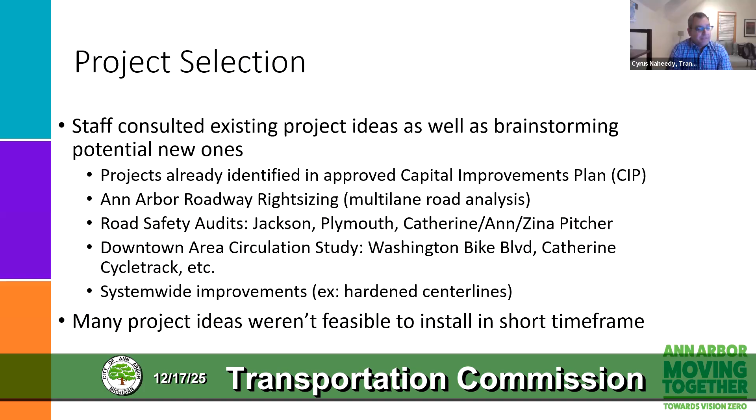That could be a combination of pavement markings or hardened center lines to help with slowing and squaring left turns. And it was quickly apparent to us in our early discussions that many project ideas are just not feasible to install in a short time frame. They involve changing concrete, some level of analysis, some level of coordination. And so going from start to finish in effectively less than a year was kind of a big constraint that we were trying to work through.

And so with that in mind, the CIP, again, a lot of projects identified there are capital projects that involve concrete. The roadway right sizing and road safety audits also are in progress, and we're waiting on that analysis. We didn't feel prepared to be able to build a project based off of an analysis that's not complete. So right off the bat, we ended up striking a few different categories. It became apparent fairly quickly that there was going to be some limitations in how we had to proceed.

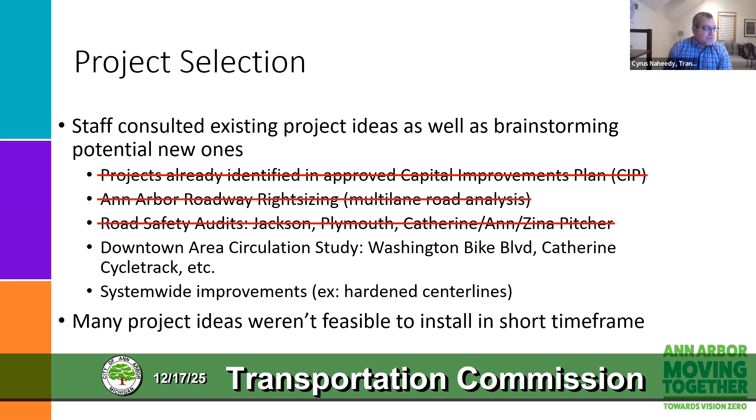So with that in mind, we collectively decided that the Catherine Cycle Track does fit various criteria quite well.

In order to implement the project before June 30, 2026, the existing conceptual plans exist as part of the downtown area circulation study. Public engagement was also completed through that.

There is alignment with Vision Zero goals and identified safety issues. This section of the cycle track is a Tier 2 corridor with crash history, including one A-level pedestrian crash and several less severe pedestrian and bike crashes.

This also builds off of previous work that has occurred here. Two intersections, at Catherine and Ingalls and Catherine and Thayer, have been converted to all-way stops, and we've also installed street lighting to better illuminate those intersections.

But the cycle track would reduce crossing distance and build our multimodal connections a little bit better, integrating into our existing and planned multimodal transportation network.

It builds off of the existing Catherine-Miller cycle track and the recent extension of the Miller cycle track to Maple. There's also integration with the Catherine Glen Zina Pitcher capital project, which we'll touch on briefly in the next presentation.

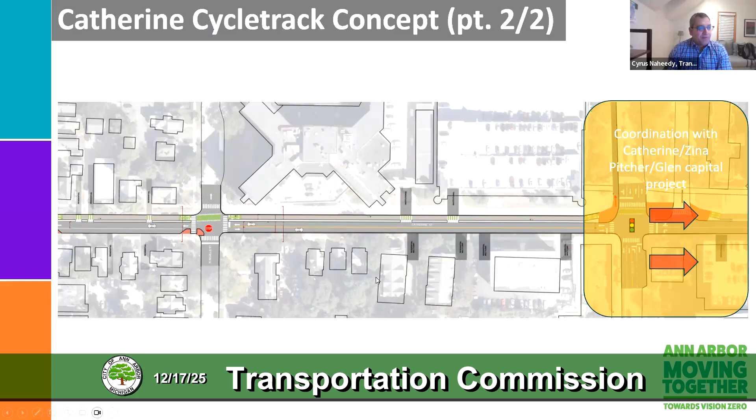So to install the cycle track as conceived and designed, north curbside parking would need to be removed for those three blocks between Division Street and North Ingalls on Catherine.

So the action item before commission would be to recommend or to not recommend approval to City Council of the parking removal resolution. Just wanted to give a brief overview before we move on to either that action item or the next project, but I wanted to get through that as quickly as I could because I wanted to make sure there's time for discussion and questions.

All right, first up, questions, Erica.

Yeah, thanks, and thanks for the presentation. I just wanted to provide a little bit of additional background as well.

So one question I wanted to get answered at the beginning of the conversation, Cyrus, is this a major road? Yes, all of our Tier 1 and Tier 2 roads, as identified in the transportation plan, are major roads.

And so that was one of the questions. I just wanted to make sure the commission all heard that. That was one of the questions I had as well when staff originally sent this presentation, or recommendation, to us earlier in the fall.

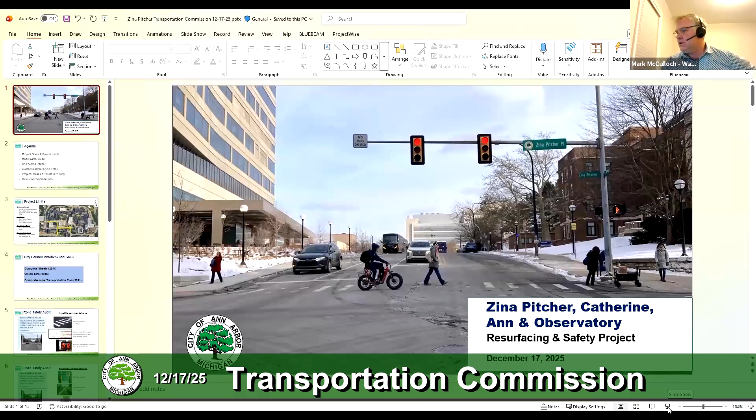Sharing that and going power. Everyone can see my screen? We can, thank you. Okay, so what we're looking at here is the cover slide, a picture of Ann Street looking east from the intersection of Zina Pitcher. It says Zina Pitcher, Catherine, and Observatory Resurfacing and Safety Project, dated December 17th, 2025. This slide is our agenda.

It reads, we're going to talk about project goals and project limits. We'll briefly start with a sneak peek of the road safety audit performed by WSP through a SEMCOG grant. We'll then transition to details of the Ann and Zina Pitcher intersection. We'll briefly talk about a small component discussed previously by Cyrus on the Catherine Street cycle track, go into project phases and tentative timing, which is in flux by the day but we're getting closer to figuring out, and then talk about the detour accommodations.

So slide 3, title reads Project Limits, with a picture of the medical campus of the University of Michigan. There are four streets highlighted in yellow: Catherine Street from Glen to Zina Pitcher, Zina Pitcher from Huron to Catherine, Ann Street from Zina Pitcher to Observatory, and Observatory from the roundabout south to a point just north of East Medical Drive, which is owned and maintained by the University of Michigan.

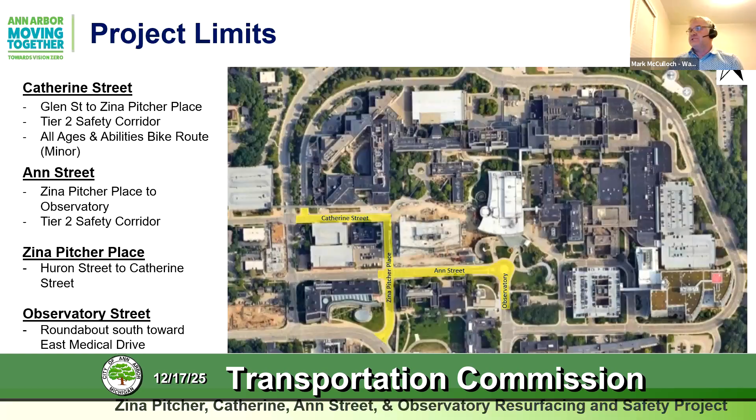Slide 4 talks about city council initiatives and goals. It reads Complete Streets, passed by council in 2011; Vision Zero, passed by council in 2015; and the Comprehensive Transportation Plan, passed by council in 2021. These were the three primary bodies of documents used to figure out scope and what improvements could be incorporated beyond resurfacing the roadway.

Sneak peek of the next slide, slide 5, titled Road Safety Audit Final Recommendations. I was not involved in this study and don't have all the background information. This will be presented, to my understanding, to the Transportation Commission on their agenda in January. However, some of the final recommendations from this study apply to the four corridors listed as part of this project, so that's what I wanted to touch upon.

This slide shows pictures and text of some recommendations from that study. One is a picture of a crosswalk, with a recommendation to provide new pavement markings and freshen them up, which would be automatically included as part of this resurfacing project. Second, there's a phasing diagram tied to updating signal timings, primarily at Glen and Catherine and at Ann and Zina Pitcher, to enhance safety for all intersection users. Third, there's a picture of a countdown pedestrian signal, recommending countdown signals be added at Ann and Zina Pitcher.

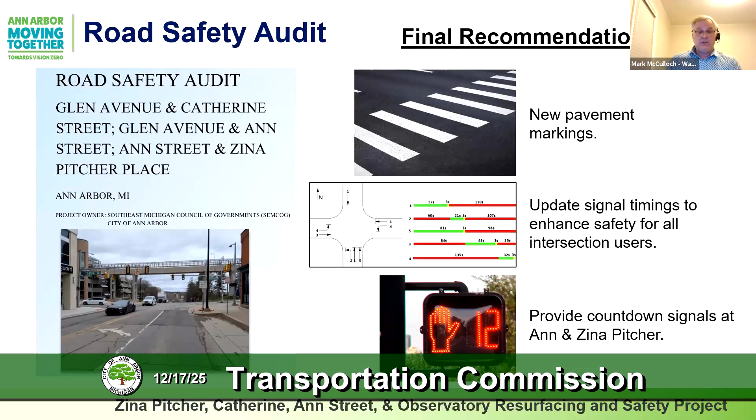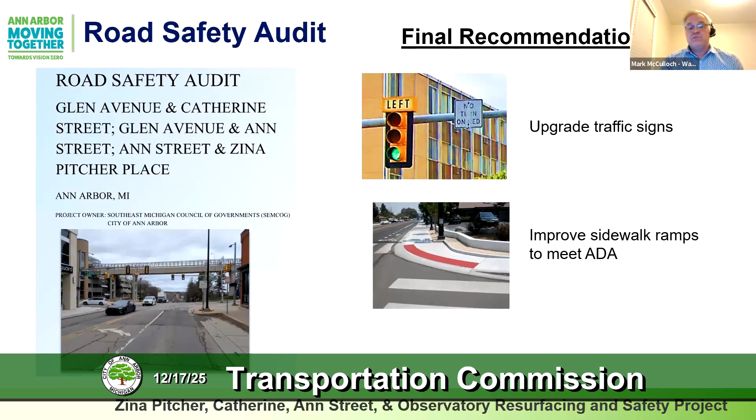Two other recommendations were to upgrade traffic signs, such as a no-turn-on-red sign at the intersection of Glen and Catherine. As part of this project, we would update signs along the corridor so they have good reflectivity, are current with the MUTCD, maintain uniformity, and ensure we have the right signs so we're not overloading messages to roadway users. Finally, there's a picture of an ADA ramp at an intersection, with the recommendation to improve sidewalk ramps to meet the Americans with Disabilities Act.

One thing we plan to do as part of this scope is decrease the radius of the corner but increase the surface area of the sidewalk at the radii, providing bump outs using the space that was there for the right turn lane. This will enhance safety for pedestrians by shortening their exposure time to traffic while crossing from one corner to the other.

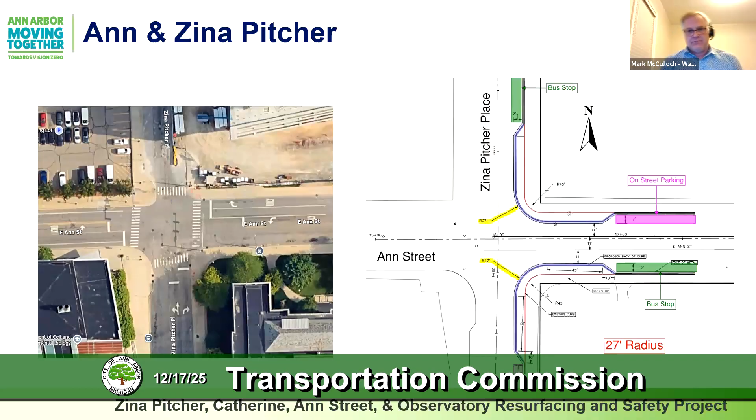Piggybacking off of the next slide, slide 9, titled Catherine Street Cycle Track. There's a diagram here, an illustration obtained from the Ann Arbor DDA circulation report. Cyrus has gone into a lot of detail, so I don't need to get into all the text. The focus of this slide is shown in red.

The dashed blue line is the cycle track in totality from Division to Zina Pitcher. Cyrus's group is focused on Division to Glen, and my team will work with him to finish the cycle track in paint and post from Glen Street to Zina Pitcher. There's no on-street parking affected in this segment, so the resolution just passed is not applicable to this segment of construction.

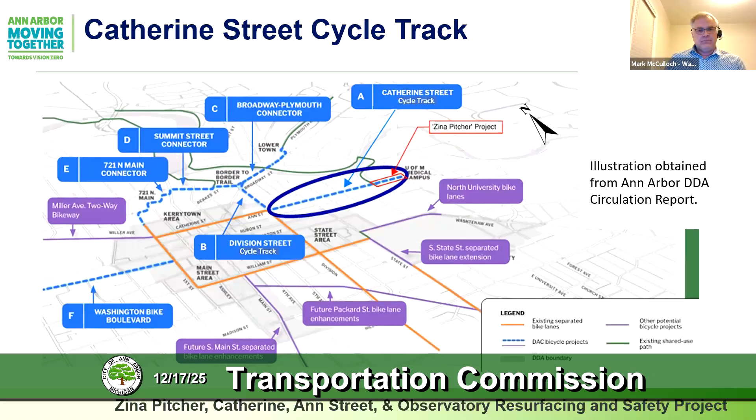Slide 10 is titled Catherine Street Cycle Track, Glen Street to Zina Pitcher. We have an illustration, bird's eye view, and a picture showing what a paint and post cycle track would look like. This isn't Ann Arbor, but it shows a cyclist traveling in a two-way cycle track with a buffer space between the travel lane and the cycle track, using plastic delineation devices to separate cars from cyclists to protect them.

The illustration demonstrates that between Glen and Zina Pitcher there are 3 lanes of traffic, one way traveling from east to west. The idea is to utilize the northmost lane to convert it into a bidirectional cycle track, leaving sufficient space and capacity for motorized vehicles to go westbound on Catherine Street and continue north or south on Glen Street, or continue west on Catherine Street.

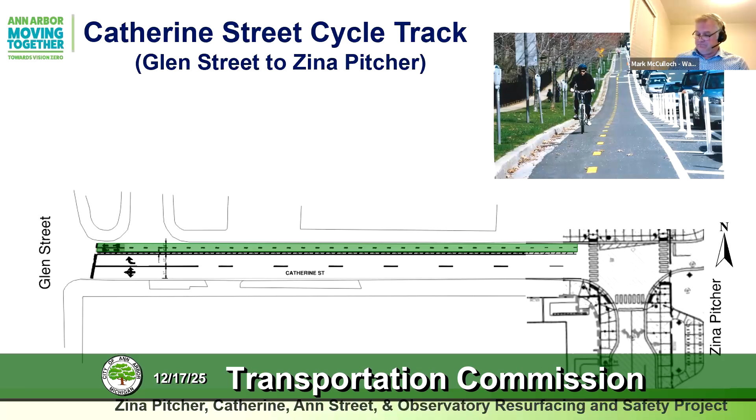Slide 11 reads project scope, with pictures illustrating the main type of work anticipated for this project. The first picture shows paving the roadway. Originally this was designed as a resurfacing project. Since then, decision makers at the city felt it would be beneficial to incorporate outcomes identified in the safety audit, making this not just a resurfacing project but a safety project as well.

Other aspects will be sidewalk and curb work, shown in a picture of gentlemen working on the curb, putting concrete down. The third picture is a storm sewer inlet - there will be a handful of inlets reconstructed because they're old and outdated. There's an image of the cycle track, the fourth image, not Ann Arbor, but again the same concept of paint and post.

The fifth picture is traffic sign upgrades, which we talked about - a picture of a no turn on red sign at an intersection, which I think is in Ann Arbor. Finally, traffic signal upgrades. This would primarily be at the intersection of Ann and Zina Pitcher, where one of the existing signal mast arms will be replaced because it's too close to the roadway itself.

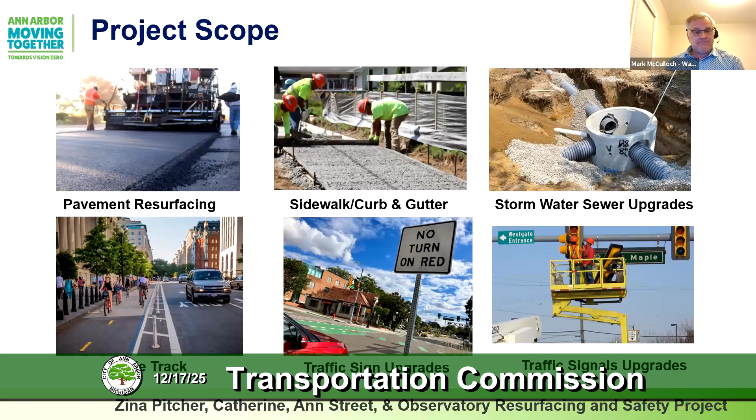What we wanted to articulate to anyone watching this presentation is, yes, traffic will be moved around, and there will be some closures as part of each phase, but the focus is not just cars. It's also making sure that cyclists and pedestrians alike have the ability to get from point A to point B should there be a closure that impacts them as well.

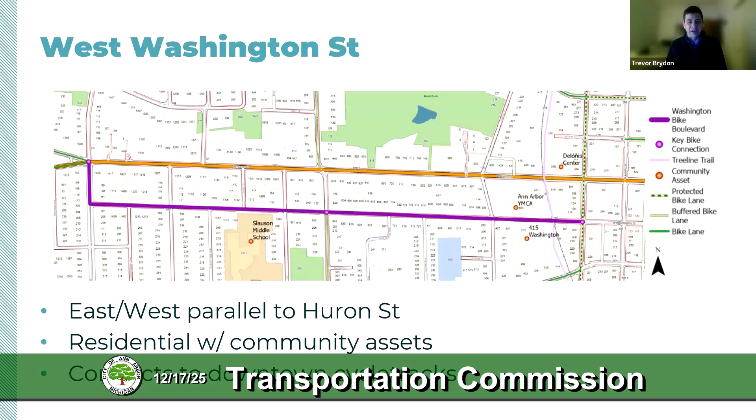This project is being funded with a carbon reduction program grant. This is a US DOT federal grant that was awarded for the purpose of an expected reduction in pollution from a small percentage of trips shifting from car to bike due to it being more comfortable and safe to bike down West Washington. The screen shows some goals for the project that were laid out: to build a safe, comfortable network of bike routes for people of all ages and abilities.

That's more general in our plan. For this project, the goal is to provide a dedicated and convenient alternative for people riding bikes in the Jackson-Huron corridor, and to also meet latent demand for safe bike facilities in the area. This project is scheduled for our current fiscal year, and it was awarded $200,000 with a local match. We estimated that this would save 476.75 kilograms of carbon dioxide per day.

Trevor, clarification, it was a $50,000 match, not $500,000, correct? Yes. Okay, thank you, that is what is labeled on the screen. Apologies for my misreading of it. $50,000 match. Thank you.

As part of the downtown area circulation study, which we talked a bit about with the Catherine Bikeway, the Washington Bike Boulevard was also one of the projects that was considered and got considerable community feedback and support from that study. There was data collection that was part of that study as well, and it reiterated the transportation plan goal of all ages and abilities bike routes that connect to downtown. There was also a concept developed for the Bike Boulevard at the time, and some of the elements are being used for this project.

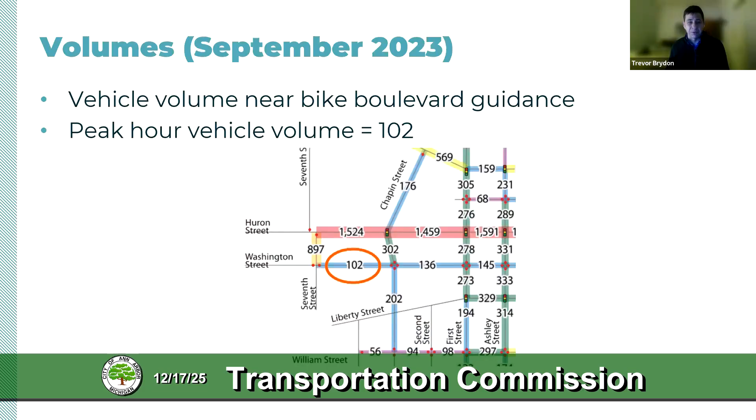So conditions and considerations for West Washington Street. We need to consider volumes. As of September 2023, when the data collection took place, the segment between South 7th Street and 3rd Street had 102 vehicles at the peak hour. As you remember before, we were looking for about 50 vehicles in the direction for the peak hour, so the existing conditions are already pretty close to what we'd be looking for as far as peak volumes go.

Speed is another consideration. We're looking for vehicle speed less than 25 miles an hour. This operates largely as a residential street. Of course, one side has some on-street parking that serves the YMCA as well. Fairly slow moving. One of the ways that we have detected speed in the area is that 2 years ago...

We worked with a company called Velo, who makes devices that attach to bikes and measure various things and take video to be able to track the speed and the distance at which cars overtake cyclists. West Washington was one of the routes that had a lot of use and a lot of data recorded. Over 130 minutes were recorded during that time. When we compare speeds with other corridors in the area, the average speed of overtakes was about 19 miles per hour, and the maximum vehicle speed for these overtakes was 24. It confirms a lot of our other experience in the corridor as well at various times of day.

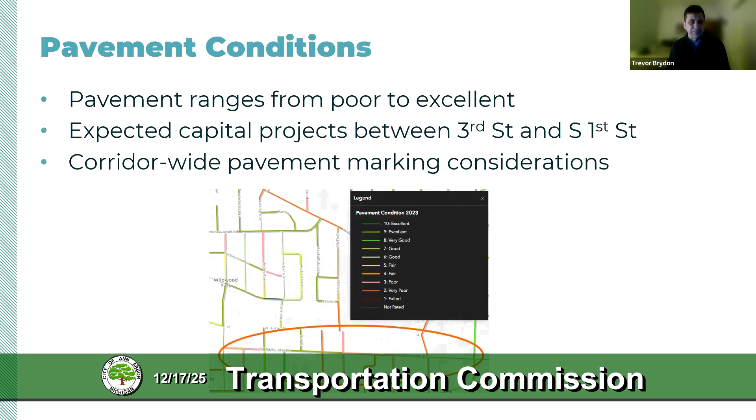There will be a private vehicle drop-off on 8th Street and Crest Avenue, pulling them away from the doors a little bit.

The project approach involves a tight timeline. The West Washington Bike Boulevard elements we're looking to implement use this federal grant, so we need to proceed with paint and post materials to reduce the amount of environmental review required for this project.

Safety and comfort enhancements included in this project involve looking at a traffic diverter at South 7th. There is a skew and a crest near Huron Street that creates a complicated safety circumstance at the intersection with limited sight lines. We're looking to bulk up that area, slow vehicles, raise attention to what's through, and filter some vehicles off of West Washington.